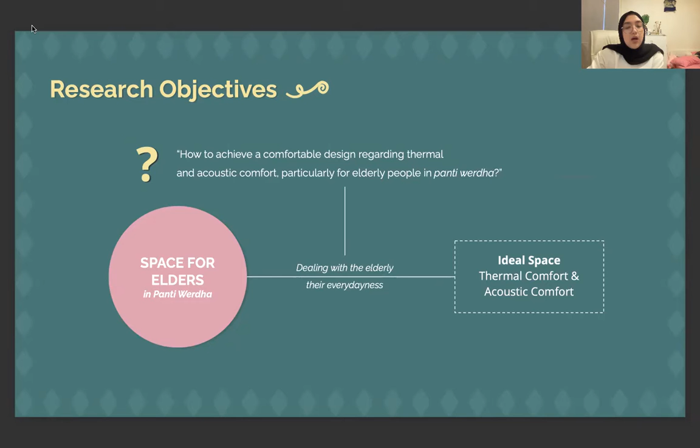This research will be focusing on the space for elderly. It will be dealing with the elderly's everydayness, and the goal is to find an ideal space for the elderly.

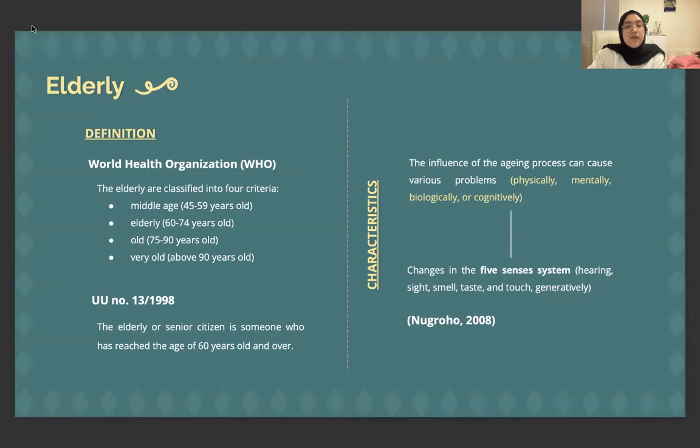The next chapter is the literature study. We are going to be discussing the elderly definition and characteristics, then elderly housing definition and purposes, then human comfort, which is focusing on acoustic and thermal comfort.

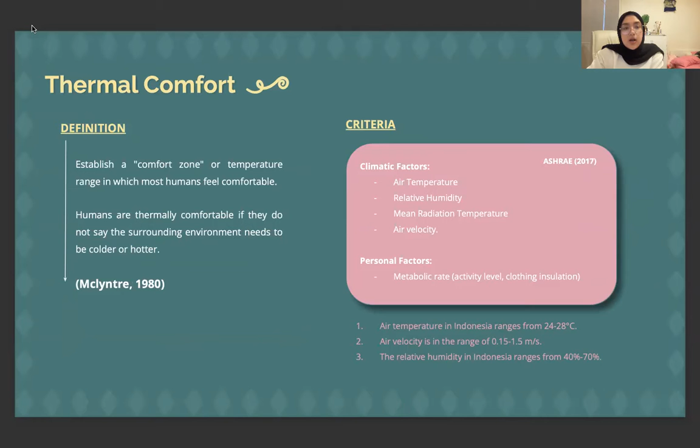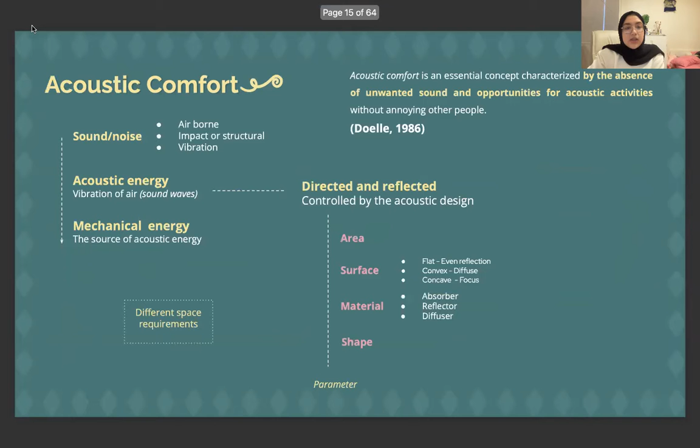For the acoustic comfort, which is related to sound and noise, we're going to discuss the sound characteristics in the room, then use noise level as our index, referring to the standard from SNI. It will be equated with hostels, apartments, or dormitories.

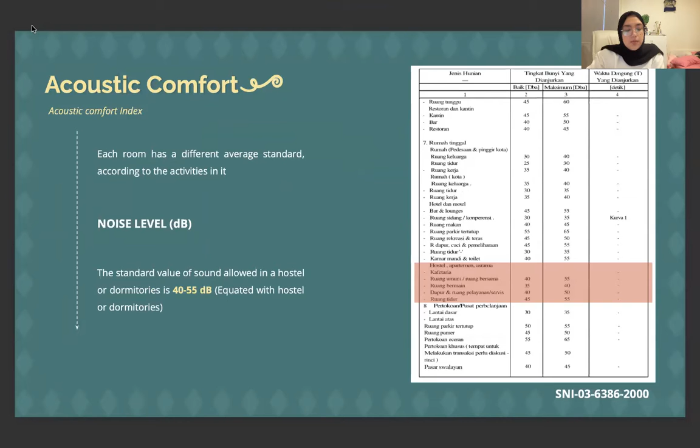First of all, the profile of our case study. Panti Sosial Tresna Werdha Budi Mulia is the Panti Werdha that belongs to Dinas Sosial of DKI Jakarta. It accommodates up to 270 people, and the people living here mostly come from the street with social welfare problems.

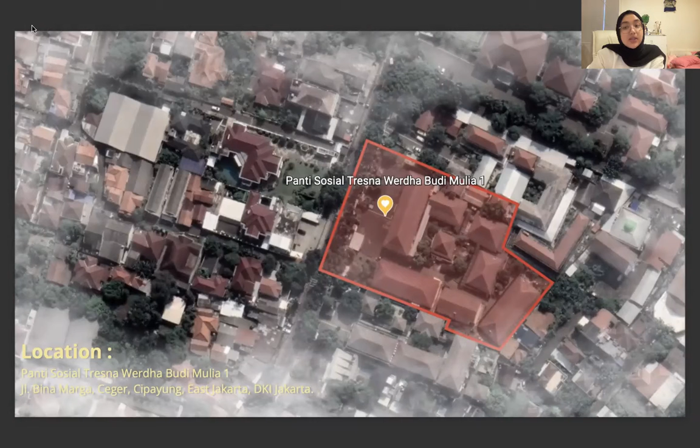These are the maps of the location. It's located on Jalan Bina Marga street, which is the main road connecting Cibubur and Kampung Rambutan, so that's why the street is quite busy and congested.

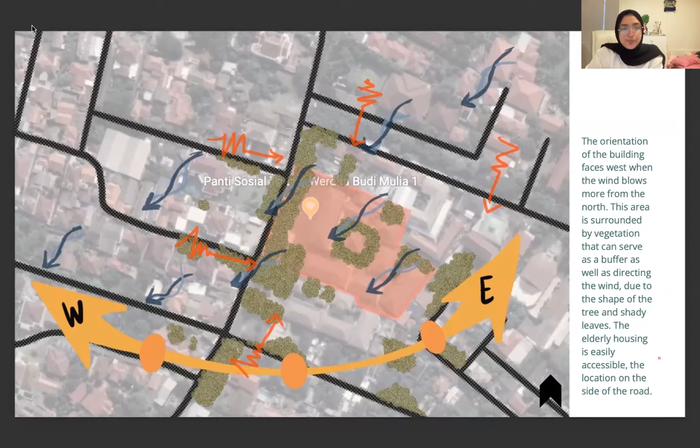Seeing the site analysis of the area, you can see the orientation and also the source of noise and the wind that comes to this Panti Werdha.

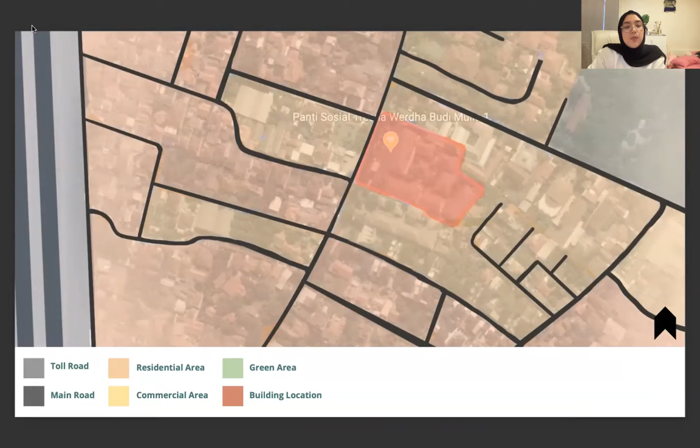Seeing the surrounding area and also the zoning, you can see that Panti Sosial Tresna Werdha Budi Mulia is surrounded mostly by residential area, and also commercial and public facilities.

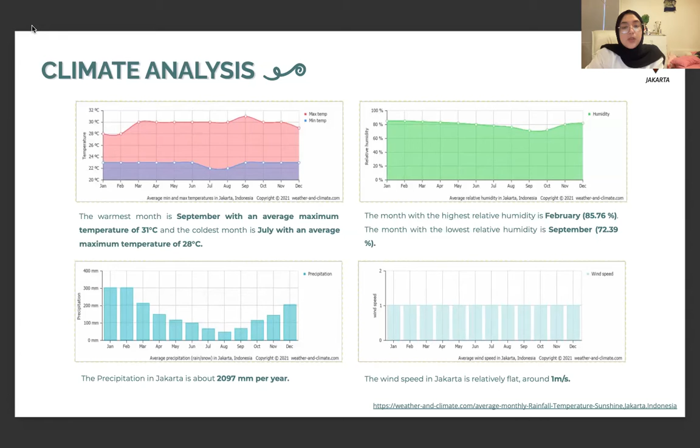Then we're analyzing the climate, especially in Jakarta. Overall, Jakarta is in a tropical climate with high temperature and relative humidity.

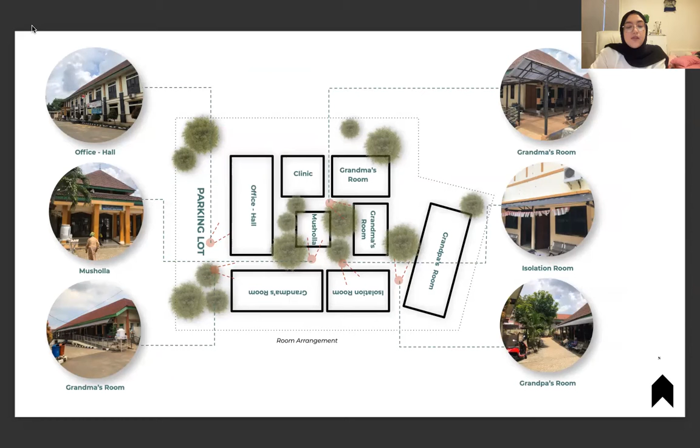These are the mapping of the buildings in Panti Werdha. It consists of several buildings located in one complex, all oriented to the middle courtyard, which is the musholla. This is the mapping of the green area in Panti Werdha.

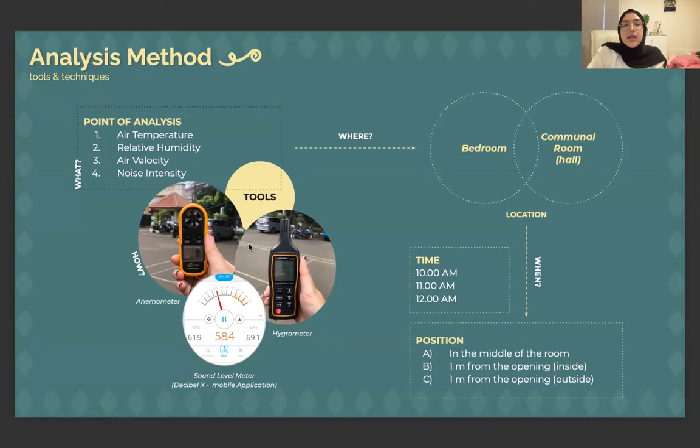intended for the independent elderly. The consideration is because of the location and the activities, which are busier than the other bedrooms.

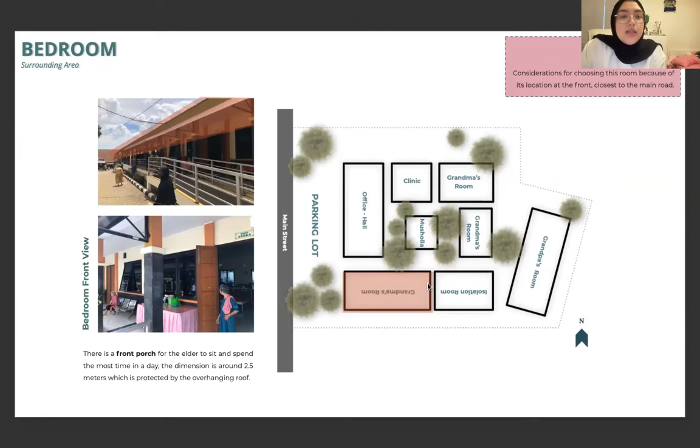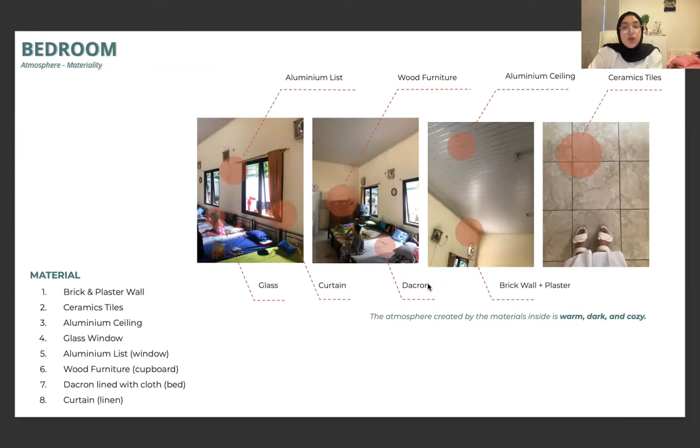These are the profile of the bedroom and the materiality that creates the atmosphere inside. It's basically dominated with brick, plaster, ceramic, and aluminum. These are the ventilation system and the opening used in the bedroom.

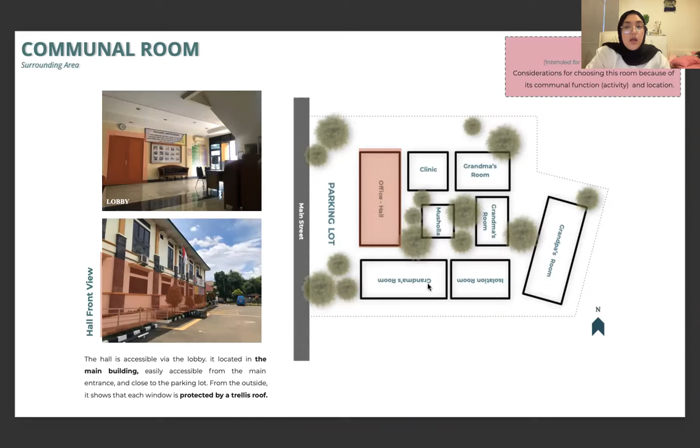Then for the communal room, it is located in the main building, accessible from the main entrance. These are the profile of the communal room, then the materiality and the atmosphere that is created.

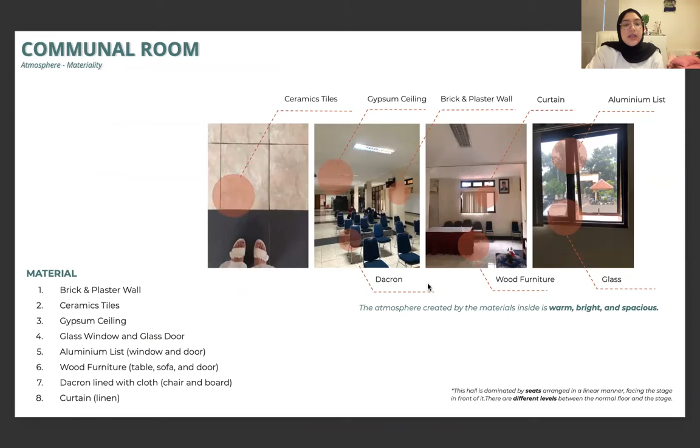So first, for the measurement, we're going to be analyzing the thermal comfort. These are the indexes that we are referring to.

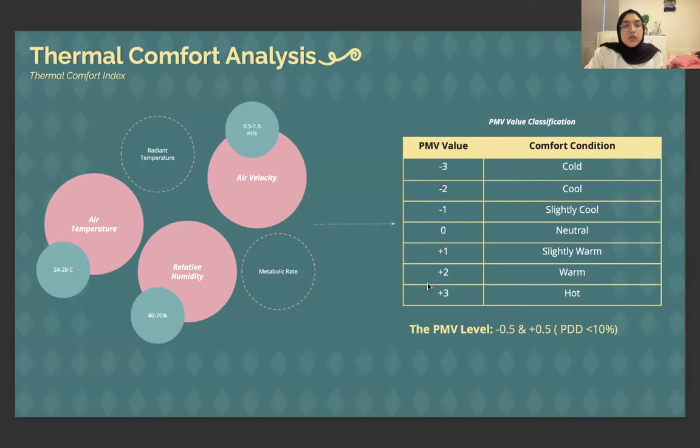In the first room, the bedroom, we are measuring in 3 positions, A, B, and C, measuring air temperature, relative humidity, and air velocity in each position and each time. And we can get the PMV level and the average in each time.

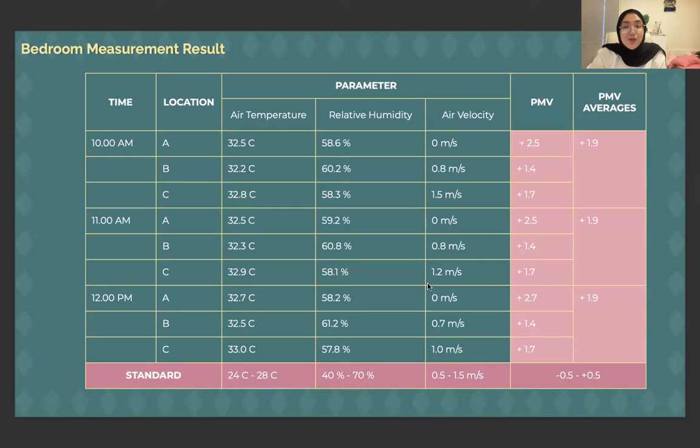Based on that measurement, we can translate it into a graph, and these are the results. From that parameter, we can get the predicted mean vote, which, if we conclude it, is quite uncomfortable, at around 1.9, which means this room is warm.

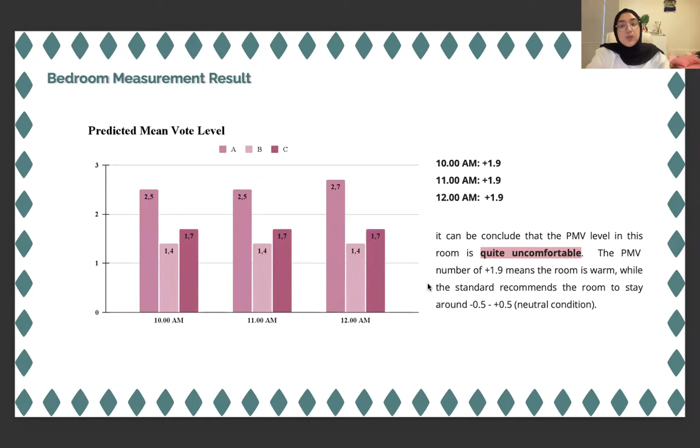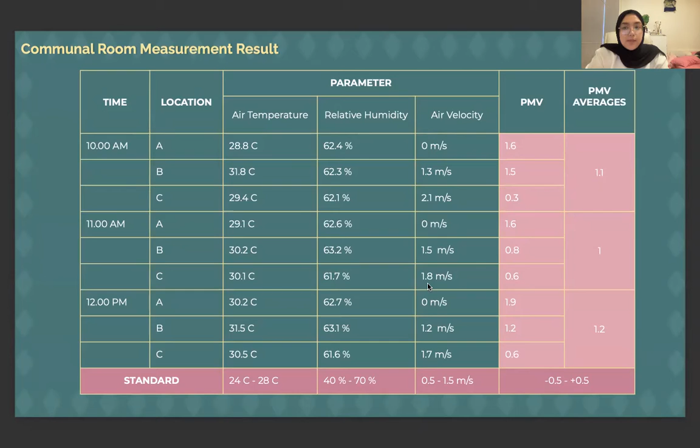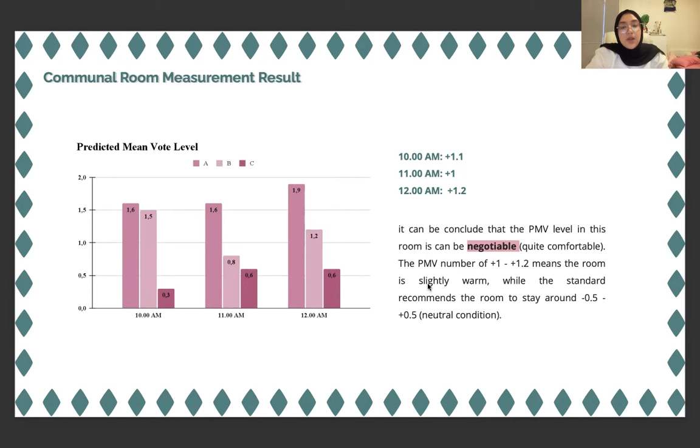Next is for the communal room. We measured in 3 positions, A, B, and C. As with the bedroom, we calculated the parameters to get the PMV, and these are the graphs of each parameter. To conclude, the PMV level in the room is still negotiable, better than the bedroom, with a PMV number of 1, meaning this room is slightly warm.

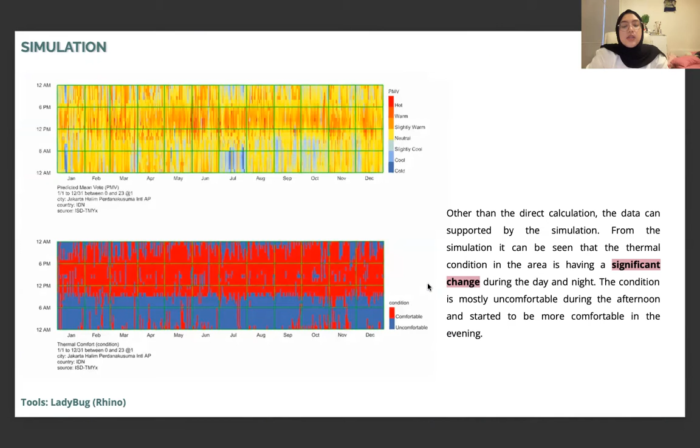We also did a simulation with Ladybug and Rhino to see the condition where we couldn't measure in time. We can see significant changes during the day and night, with conditions mostly comfortable in the evening or night rather than in the morning or afternoon.

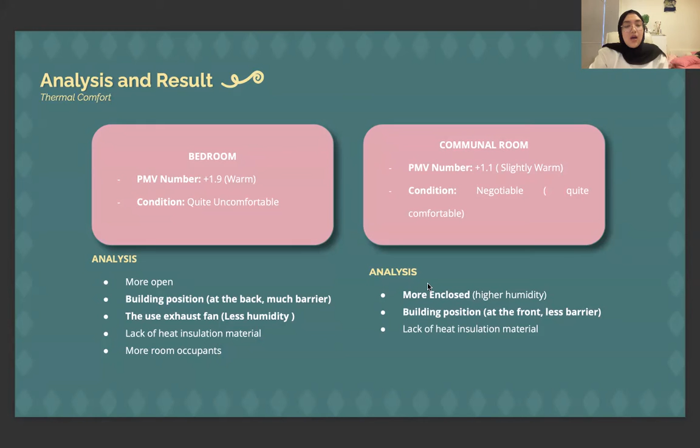For the analysis of the result, we can see that the PMV number for the bedroom and the communal room is still higher than the standard. This is because of the building orientation, the use of the mechanical ventilation system, and a lack of heat insulation material. Also, the bedroom has more occupants than the communal room, which makes it harder, since people themselves can be a source of heat.

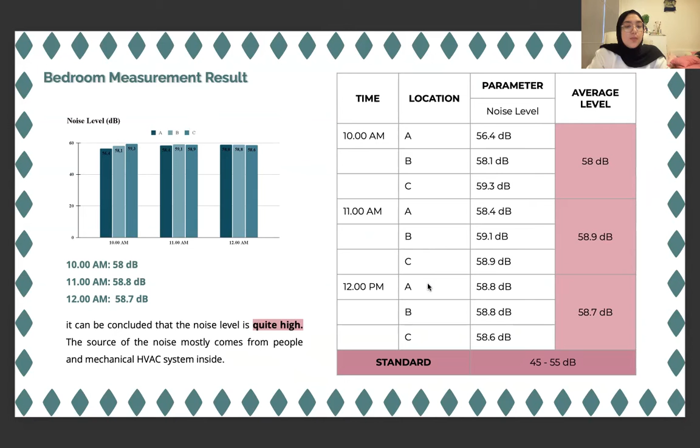Based on the measurement, we can get the noise level. It can be concluded that the noise level is quite high, but the source mostly comes from people and the mechanical HVAC system inside.

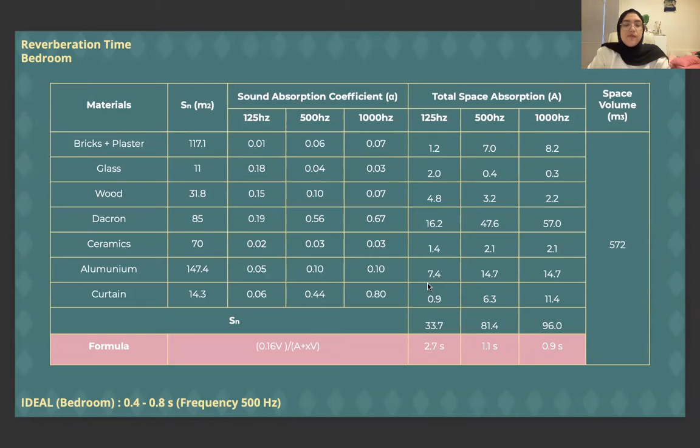We also calculated the reverberation time in the bedroom, which is about 1 second up to 2.7 seconds. Meanwhile, the ideal for a bedroom is 0.4 to 0.8 seconds, so it's still higher than the standard.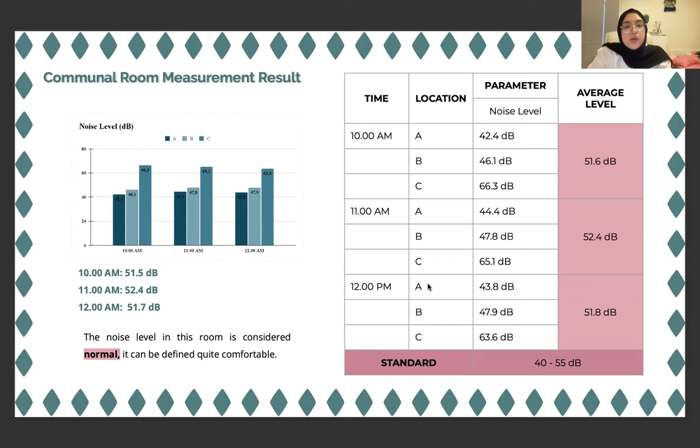Position C is where we measured outside, so we can see that the material in this common room reduces noise much better. These are the reverberation times. We still got a result higher than the standard for a common room intended for speech and mixed activities.

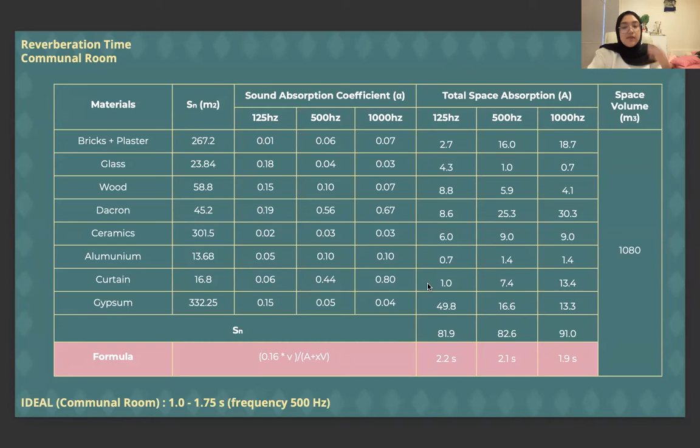The analysis is because of the building position - the communal room is more at the front with less barrier, meanwhile the bedroom is more at the back with much more barrier. Also, the use of the mechanical HVAC system in the bedroom is a source of noise, and there's a lot more absorber material in the bedroom than in the communal room, along with activities that become sources of noise.

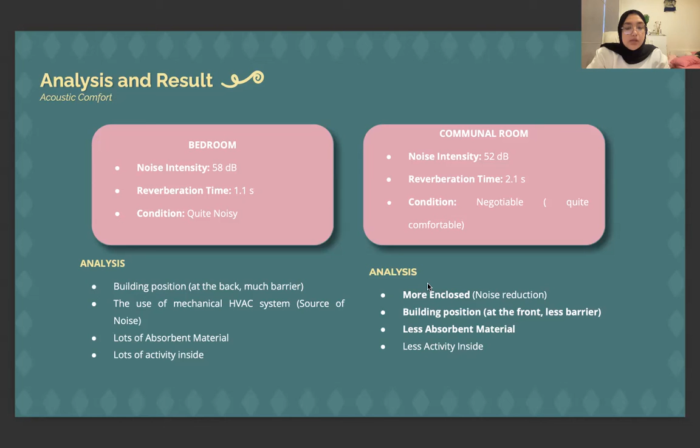Based on that analysis, we also did an interview as supporting data. We asked where they feel comfortable or uncomfortable, and how they deal with that.

They said they feel more uncomfortable in the afternoon - it's always hotter in the day but cold at night. Noises from traffic in the street are very disturbing, even though their hearing ability has decreased enough to be less sensitive to noise. When they feel more uncomfortable, they will sit on the terrace or porch, or take a walk.

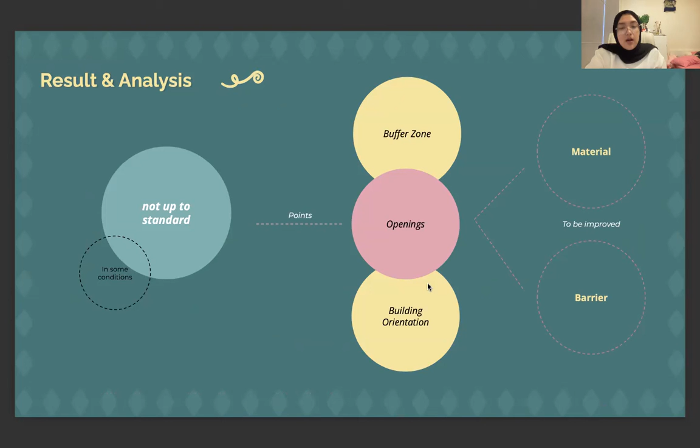For the result analysis, in some conditions there are still conditions not up to the standard. The things to be improved are the material and the barrier.

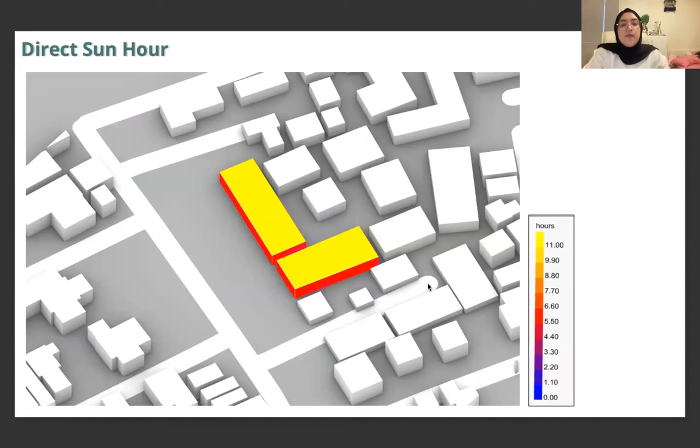We also did a simulation to see the incident radiation and direct sun hours, to support our argument that the top of the building is very exposed to the sun. For the recommendation, we are mainly focusing on 3 points: buffer zone, material improvement, and opening.

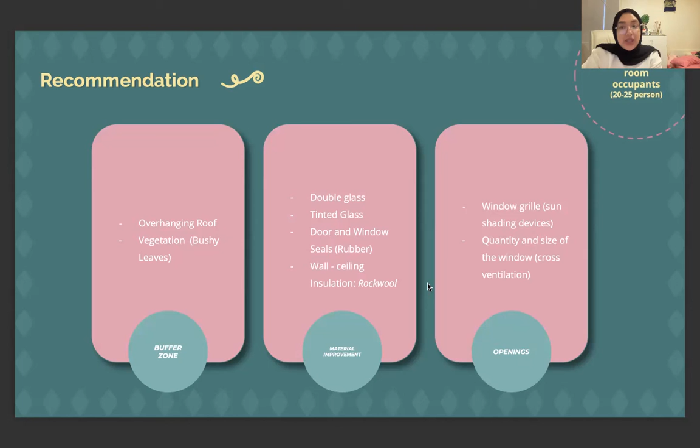There's one more recommendation: to reduce the number of occupants in the room, which is happening in the bedroom, because it can be a source of noise and also a source of heat from the people in the room itself. These are the materials we recommend.

In the last chapter, the conclusion, we can conclude that the comfort level of humans is different, not least for the elderly. For elderly housing itself, there are no specific criteria, but several factors can be considered. Based on the result of the calculation and measurement, we can see that in some conditions they're still higher than the standard.

The influencing factors are like material, orientation, opening, buffer zone, or the occupants and activities inside. The things to be highlighted are the material, opening, and the barriers.